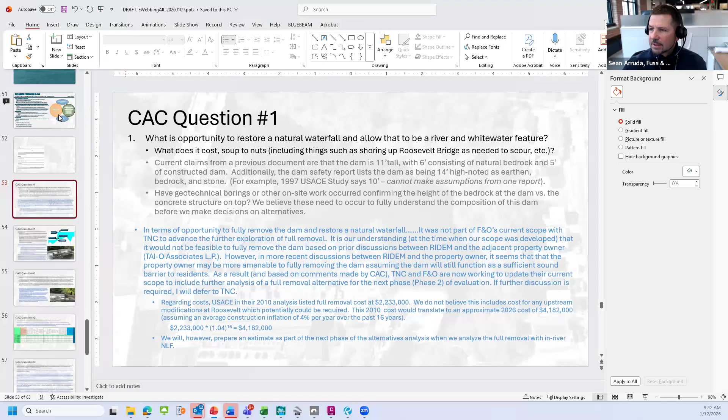And what I'm gonna do, if you guys don't mind, I'm just gonna share my screen super fast. So what you can kind of see is I'll take, for instance, this next steps of our analysis.

So within this, we've updated this now. So again, all of this is going to be called phase one alternatives assessment. Phase two, we're going to get spot elevations within the raceway channel. We're going to get river bottom elevations, which we're going to call ledge elevations, on the downstream side of the dam as part of phase two. That way we can get a better understanding, kind of like what Stefanie was saying earlier, of what the actual ledge elevations are. Obviously we know it's going to vary, but we're going to better capture that as part of phase two.

We are going to run a full removal alternative under this as part of the phase two assessment, so that then we can compare what we've done today to this full phase removal, and I can kind of show you that.

Unfortunately, with the first phase that we did, this is the results of an in-river survey that we obtained, from Roosevelt Street. It includes bathymetry, the spot elevations. I know it's a little tougher to see, maybe if I select on one they'll pop out a bit.

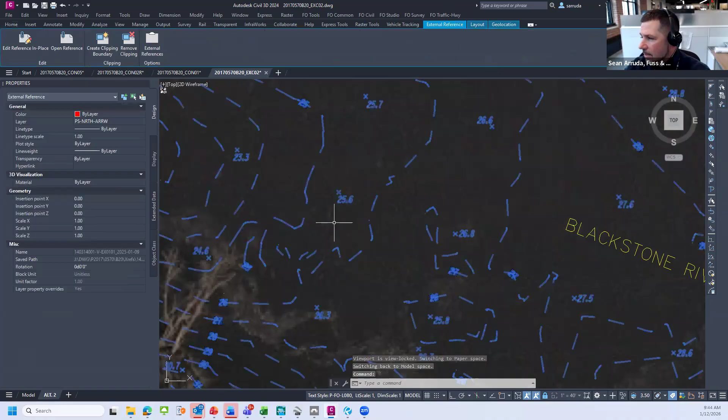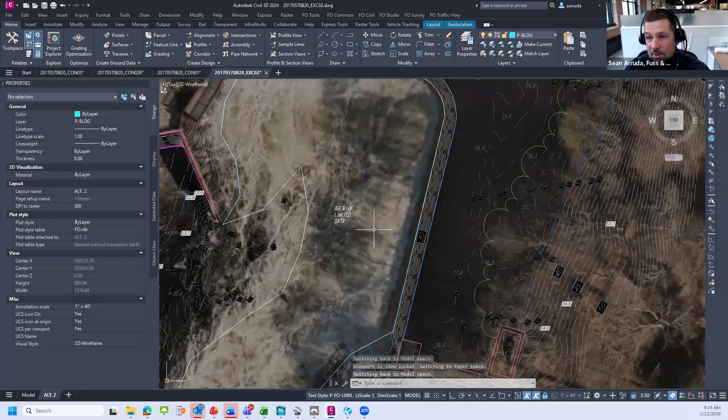At the time the survey was done, we have channel bottom elevations on the upstream side of the dam, going down to elevation 25.1, and we know the spillway crest is about 34. We didn't have any data downstream of the dam itself, because at the time of the survey it was unsafe for the surveyor to get in there due to the turbulent flow. So that's the piece of information we're looking to get and update our survey with, so we can better understand the ledge elevations that exist out there.

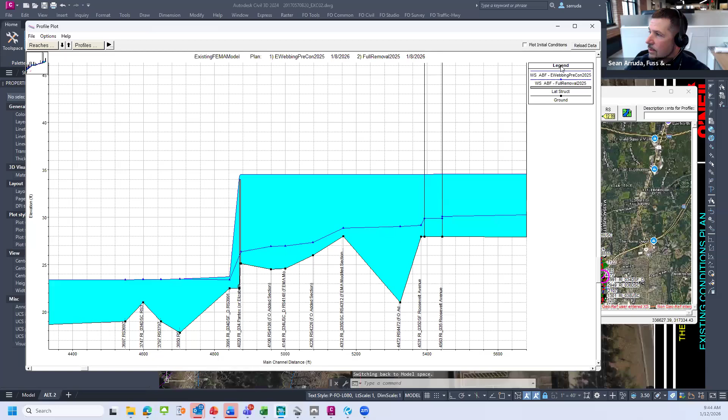This took a minute to do, and this is just a rough HEC-RAS model. The profiles I've included are ABF, aquatic base flow conditions, kind of what you typically see out here in September and August. So this is current conditions with the dam in place. The elevation's about 34.52. Again, this is not a detailed analysis.

I simply came in and took the dam completely out of there, and now you can see what that does to the water surface profile. Clearly there's going to be a drop, we all know that. But that's what we're looking to further develop from now, getting information on the downstream side of the dam itself.

So does that make sense in terms of how we're going to now incorporate this full dam removal?

I think maybe the non-technical among us, I certainly have a lot of questions about how this works, understanding how many weirs you'd need and whether the rock ramp would work or not, but maybe that's a future conversation.

Yeah, so clearly what's going to happen is we have to take the dam out. I'll give you an example. Let's use this profile, I'm going to use the 95% exceedance. I'll show the ABF, and this is what we look at.

Once we actually update the existing conditions model, and then take the dam out of there, that's going to reflect existing ledge. Things are going to pop out like, hey, what's a problem? Looking at this, I know it's maybe tough to put in perspective, but this is the dam, and this structure right here is Roosevelt Street. Clearly you can see there's a big, I don't know if it's a scour hole or whatever, there's a depression in the channel bottom here.

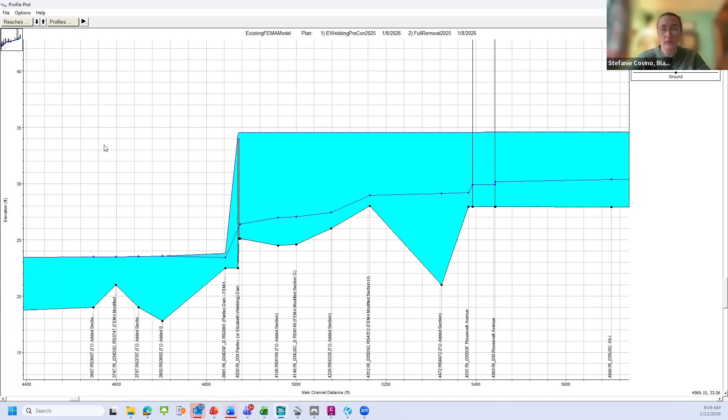Would the dam removal enhance this whole project to funders? It seems like they want to fund dam removal, so having one in the series of four, would that be an asset to finding funds?

I John, go ahead. Yeah, I was going to say, Jason, go ahead. Yeah, I'll give that a shot.

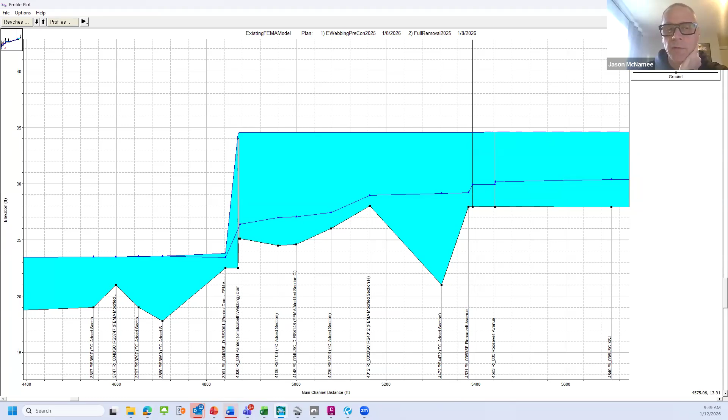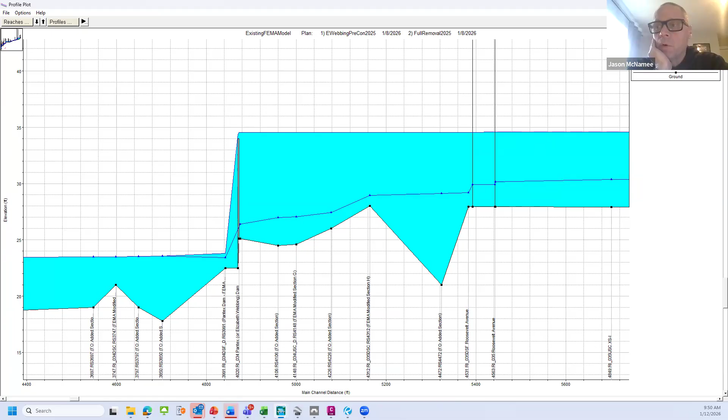I didn't mention this when I introduced myself, but I do have to jump in a couple of minutes. But Stefanie, to your point, the answer is yes, by way of NOAA. I think that scores a lot of points. If we're going after NOAA funding, it depends on the funding source, but generally speaking, NOAA likes dam removals. That's what they're generally after, and it scores you points in their applications. At least it used to.

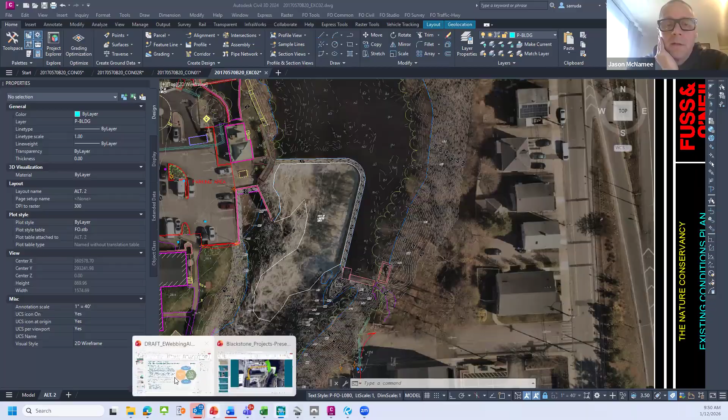That being said, this will tie into the other things I wanted to say. I really appreciate this extra work. I think this is of interest, and I think we were inclined to just look at it and say it's going to be super challenging to do a full removal, so let's not think about it. But in further discussion, seeing the questions from the CAC, it's clear that we need to understand this option better.

So I'm really enthusiastic about this extra work, trying to determine - we have a lot of conjecture about the bedrock. Maybe it's more than conjecture, but we think we know where it is, but now we'll know for sure, and then we'll better understand that as an option.

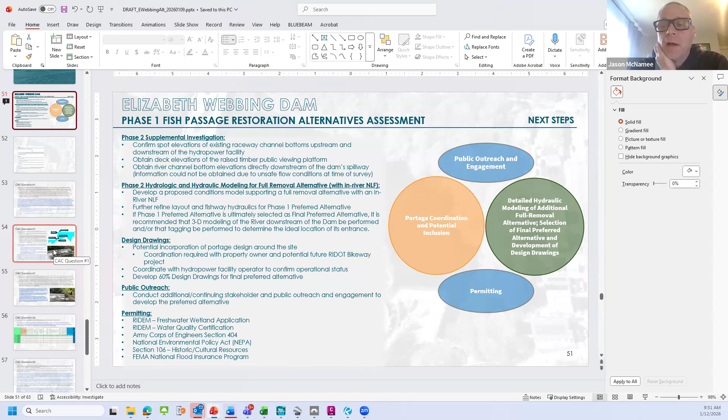I can tell you, all other things notwithstanding, in speaking with Phil Edwards from DEM's Division of Fish and Wildlife, run of river is always what we want - that's our optimal. But I just want folks to temper their expectations. We've got road infrastructure, all the stuff Sean just talked about, and even within DEM, wetlands permitting - if we start putting a bunch of structures in the water, that changes the parameters of our interaction with them. There's a lot of things we need to think through, but we will think through them.

I think that this is really a positive development in the work here at Elizabeth Webbing. So hopefully I answered John's question and prattled on a bit myself, but hopefully that helped.

Thanks, Jason. Bruce - so I guess the overall question for me is, as we're looking at all of these things, and you've already done some preliminary work, what are we looking at for timelines so we can actually look at it and know how we're proceeding? Because it seems like, from Jason's conversation, it's a lengthy process, but there could be an estimate of time spent on looking at that, and I'm curious what that is. And then the other part is, based on either of the fish ladders you're talking about, whether it's the side slotted or the natural one, what's the maintenance cost?

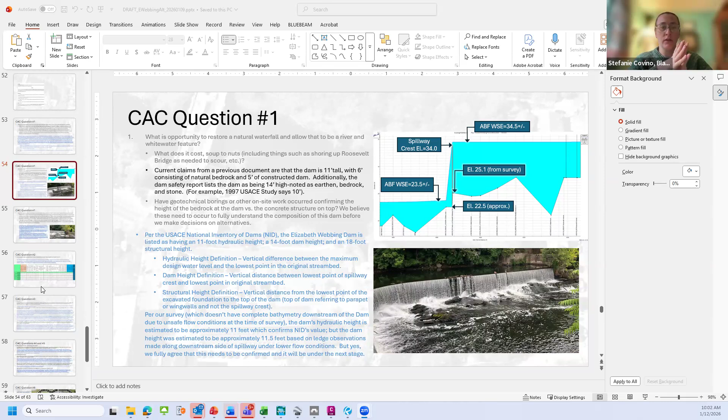I know we're jumping around a bit, and we have the full list of questions, but I wonder if it makes sense with the time we have left to summarize those into a few pieces. One was about considerations of full dam removal, and we've talked about that quite a bit. There are other elements, such as what Bruce mentioned around maintenance, and also long-term costs versus short-term costs, especially around that maintenance. Maybe it makes sense to talk more about the matrix of alternatives, explaining the velocities — that's less of a question and more of a 'can you help us understand this.' Then there were a couple questions around climate change considerations.

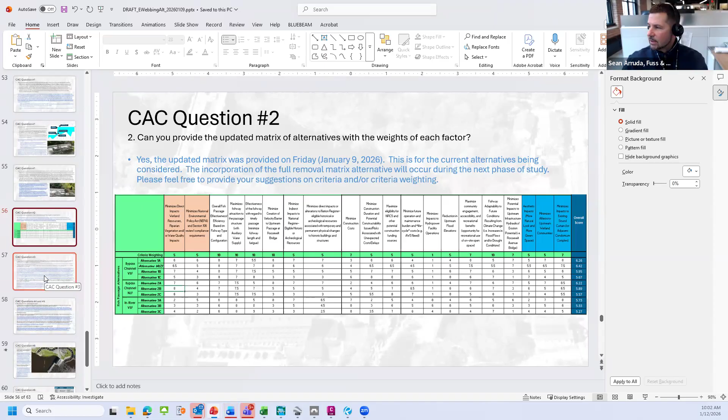So what I did is I tried to write down — you can still see on my screen here — I tried to put down your questions and put some responses in preparation for this meeting. I think the matrix is going to take a little bit, so maybe we can look at the velocities a little bit, that goes into question three, for instance.

I think your first question was about recreational paddling upstream. We heard that at the last meeting, and that was already removed from the matrix. So we're not making any sort of decision on that. It's not really a factor in our criteria for upstream paddling.

What we're looking at, when we talk about velocities - bottom line is this is the standard. We follow standard criteria, U.S. Fish and Wildlife, NOAA. We've been designing fishways this way since the Lower Shannock Falls dam removal back in the 2008-2010 timeframe, and we use U.S. Fish and Wildlife NOAA guidelines to design these sort of fishways.

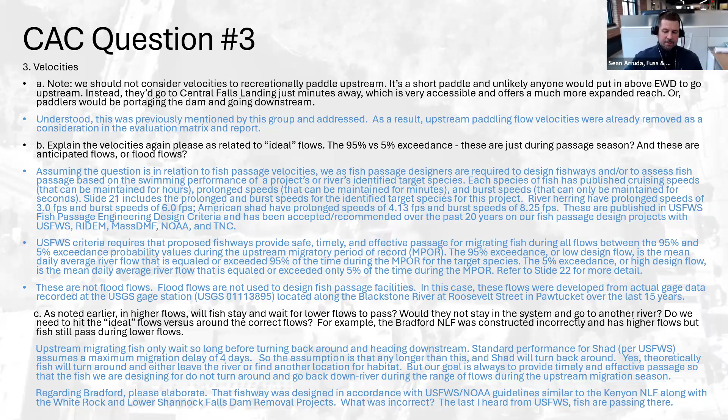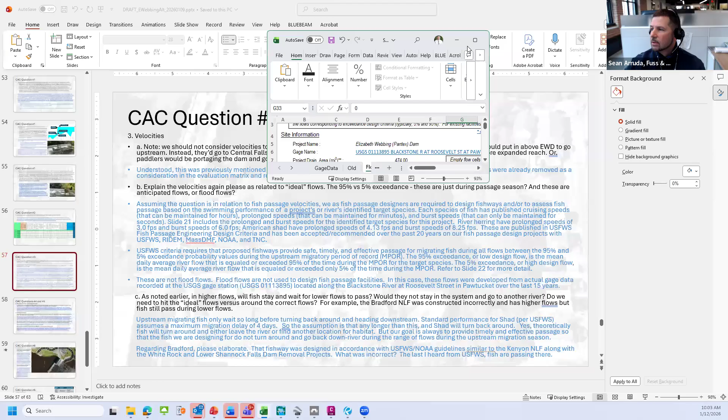So what they typically require is looking at what they call 95%, 50%, and then 5% exceedance flows. Those are specific to the upstream migration season. Maybe this helps, maybe it makes it confusing, but I'll give you an example.

This is our Excel data spreadsheet on how those flows are developed. We come in here, go to the gauge data tab - we download the USGS gauge station data from Roosevelt Street, all of their daily data, over the last 15 years.

The reason we don't pull older data than that is because we're trying to recognize that the climate is changing - flows are a little bit different now than they were back in 1960, 70. So we look at the last 15 years of data downloaded from the gauge station.

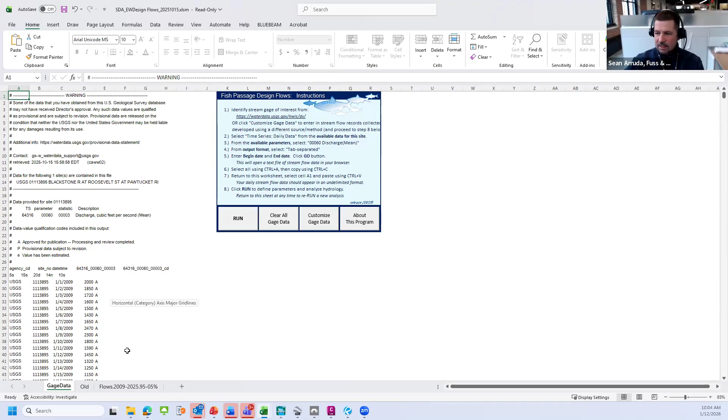This spreadsheet format was from U.S. Fish and Wildlife. The gauge data we got was from January 1st, 2009 through October 14th of 2025. We also specify the upstream passage season - based on the target species here, we're looking at April 1st to June 30th.

That takes all the daily data we've downloaded, specific to the fish passage season, and it spits out the 5%, 50%, and 95% exceedance flows. The lower flows that occurred during the upstream migration season are the 95% exceedance, and the higher flows are the 5% exceedance - that's the Q5, which is about 2,594 CFS.

During the upstream migration season, based on the last 15 years of data, this is about the highest flows you're going to see. So that's what we use as an upper limit for designing fish passage, assessing velocities, flow depths, etc.

Then we look at the 95% exceedance - that's 274 CFS going through the river at this location. That's what we make sure we can get adequate flow depths and velocities during the lower flows, so we know we're achieving the depths required for the fish species, as well as the flow velocities, for that range of flows during the upstream migration season.

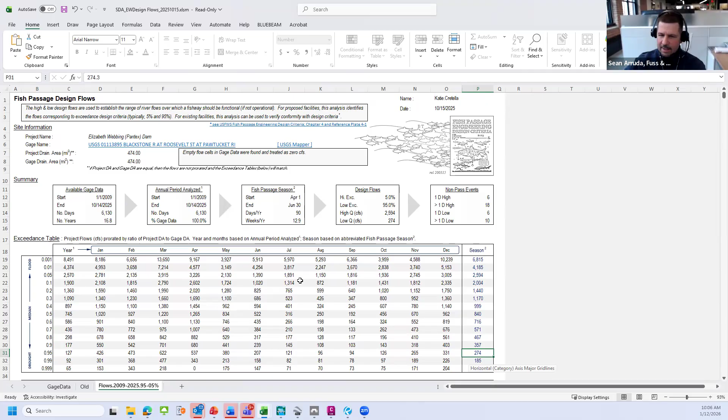We clearly look at the 50% too, but bottom line, that's what the 95 and 5% exceedance flows are and what they're used for. This is again standard criteria when designing fishways. Does that at least kind of make sense? Did I do justice in describing that?

I think so, I think I got some good notes down, but I'll ask others if you have questions.

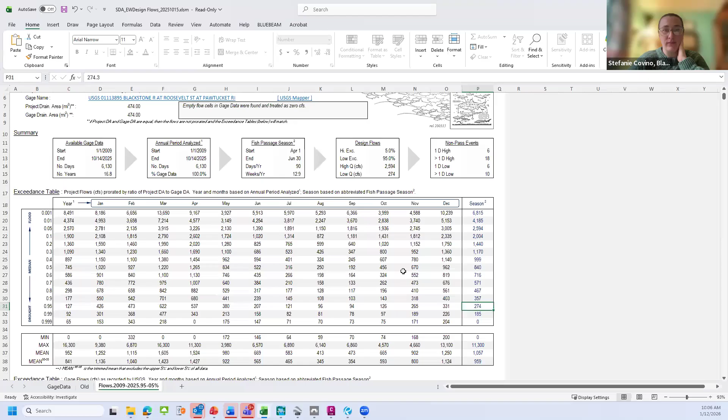Part of the other thing this does, that's just specific to the upstream migration season - we can also pull from this data, for instance, overall, forgetting just the period between April 1st and June 30th, based on that daily data we can pull out drought flows as well.

That was one of the questions - that's how we relate it to resilience, we'll say. We know, for instance, that 99.9% of the flows that occurred from 2009 to current day - only 0.1% of those flows were less than 65. So that's what we'd use as an extreme low flow condition.

That's part of the flows we've analyzed for our alternatives too, so we know we can get adequate flow depths in the fishways even during an extreme drought. Our target species aren't moving through the river during that period, but you may have resident species utilizing the river, so we're also meeting minimum depths needed for even this extreme drought condition.

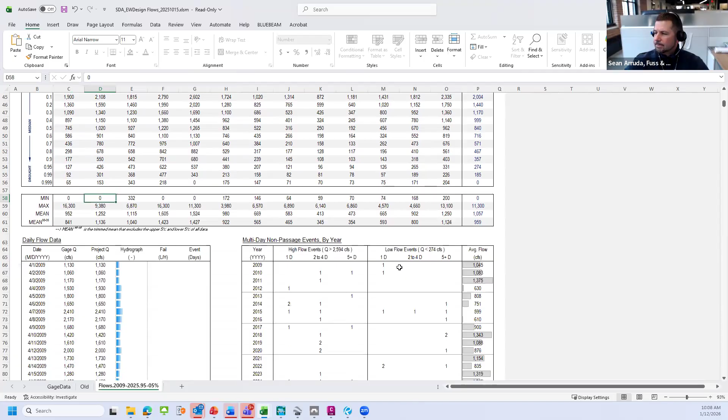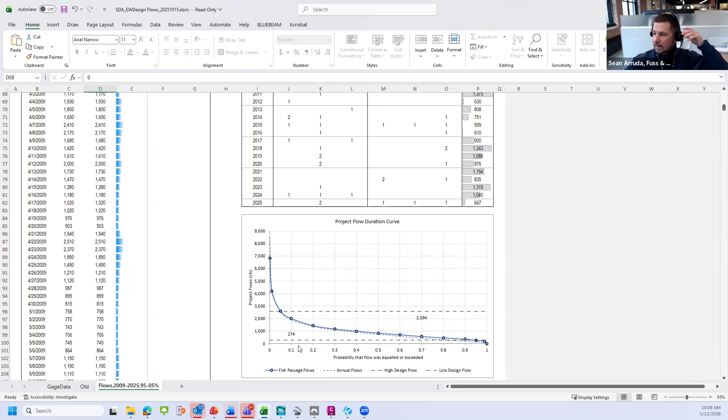So that's the other thing we can pull from this data. It gives a nice project flow curve - you can see 274 and 2594, your 95% exceedance and 5% exceedance flows. That's what we're essentially married to here. That's what we have to meet when we analyze upstream passage.

I don't think the question was saying you're choosing the wrong things, I think it was just hard to understand what it means. Understood, that's fine. For me, it's been doing this so long, I don't even think to explain it - it's just the way it is. But yeah, that's it there. Thanks, and we can share these out with everybody afterwards so they can read through as well.

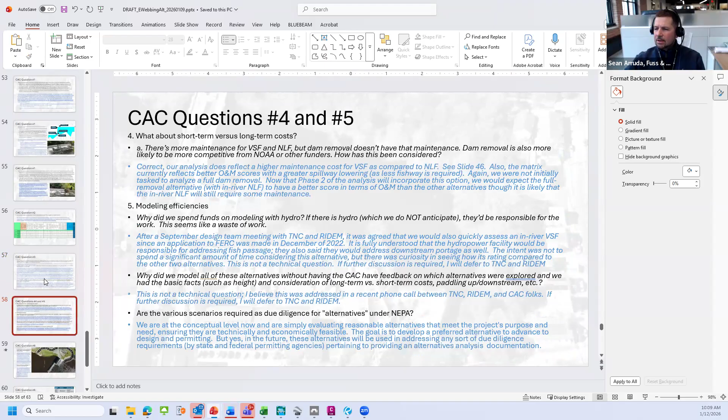So that was the question on velocities. I know there was a comment made and I wanted to understand it a bit. It said the Bradford Nature Like Fishway was constructed incorrectly and has higher flows, but fish still pass. Do we know what was incorrect about that? I'm just curious - it's not something I'm familiar with.

One of our other CAC members wasn't able to attend this morning, but my understanding is that the baffles were supposed to be on each side so the fish could jump from one to the other, but instead they were even, so the fish had this really high flow in the middle, but they were still able to get through.

That's helpful to know, because we certainly designed that years ago. I know US Fish and Wildlife did tagging and performance efficiency studies there in 2018 and 2019. In 2018 at Bradford, at least 67% of the alewife got through there. In 2019 it went up to 100%. So I think that was her point - even though it had higher flows than anticipated because of how it was initially constructed, fish were still able to get through.

So they would wait during those higher flows at the bottom pool, and when the flow is adequate they could still get up. The question was, if that's the case, particularly with dam removal in mind - if we're looking at full dam removal and we see high flows, is it automatically 'nope, we can't do this'? Or is it that there are high flows at certain times but the fish will wait and get up during other flow scenarios? I honestly don't understand how the rock ramp and weirs work, but if they could get through the weirs, would that solve it too?

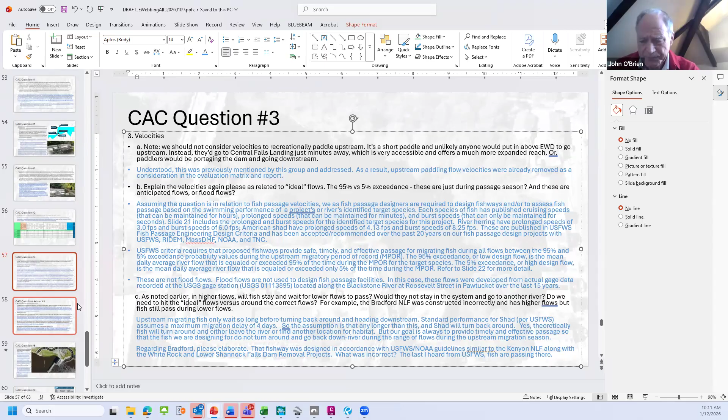I'll tell you this because the first nature like we did was at Kenyon, which is kind of a smaller version of Bradford. During that we had staggered low flow notches. At Kenyon the low flow notches, because there was less flow, were about 6 feet wide. At Bradford they're 10 feet wide. NOAA, who was part of the project team that reviews our designs, actually recommended having them in line as opposed to staggered. I think the reason is it creates a more consistent flow jet through the pools. I can't say whether they work better biologically since I don't have that background, but NOAA reviewed the Bradford design too, and their preference is to go straight instead of staggered.

We just did one up in Marshfield, Mass, a smaller version of a nature like, and we did do the staggered notches there. That was under Mass DMF review. So I'm not fully sure which one is better or not. I don't know if one potentially holds a little bit more sediment than another.

I don't know, Greg Allen, you're on the line. Do you have any experience with having those low flow notches in line or staggered? What's your experience on that?

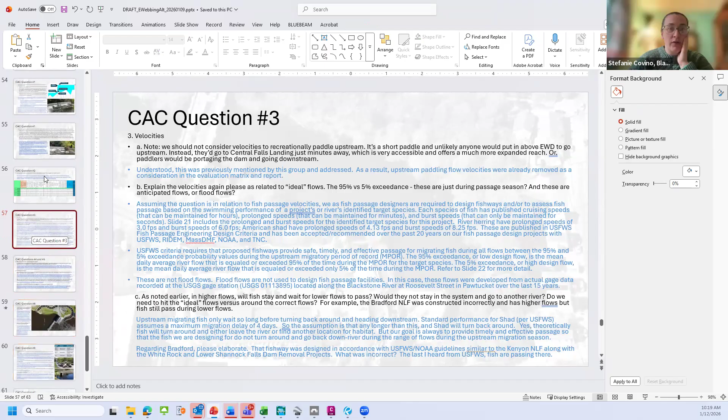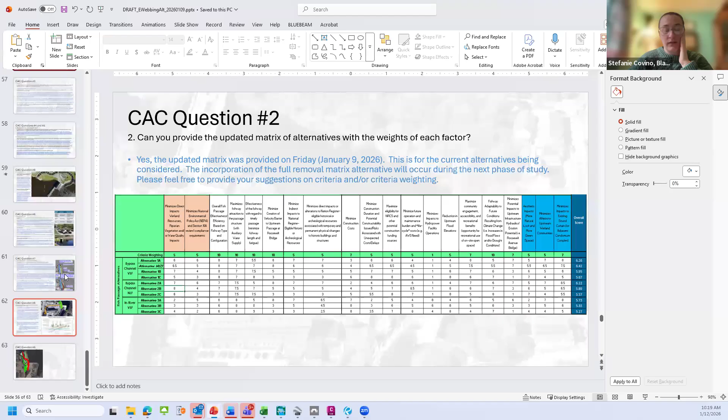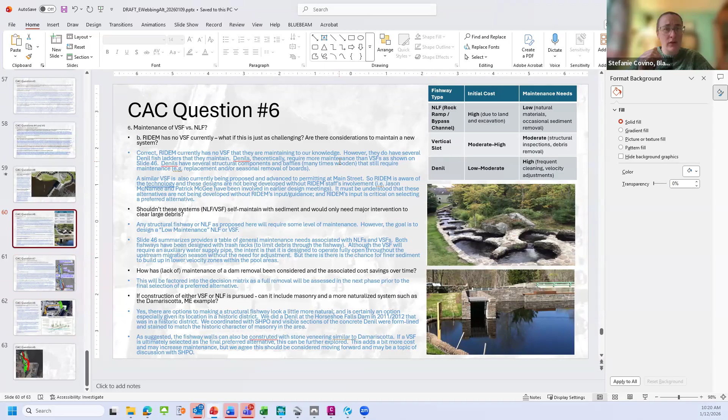I did want to highlight one thing quickly on the alternatives and discussion of maintenance, because we'd said previously maintenance is of course a concern, and if we can't maintain it, we don't really want to build it. There's a consideration of how much maintenance is included. I think maybe there was some confusion before that a Nature Like Fishway had higher maintenance or concerns about maintenance. But actually, in our last conversation, Nature Like Fishways are the least maintenance and they naturally sort of clean themselves with higher flows. That's a big differentiation I wanted to highlight.

Right, and you can see that here in the table - that table's taken from our report too. We're showing Nature Like as having lower maintenance needs than the vertical slot. I think the thing that's important to understand here - and I don't need to show the whole thing, but it's really important - I would say that this is true, we just have to realize that what we're putting in here is also a little bit of a hybrid nature like fishway.

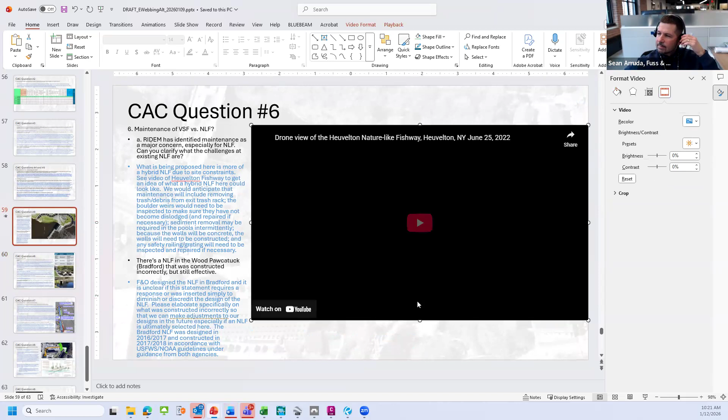Sorry, hold on. Can you guys hear anything? Okay. Give me one second here.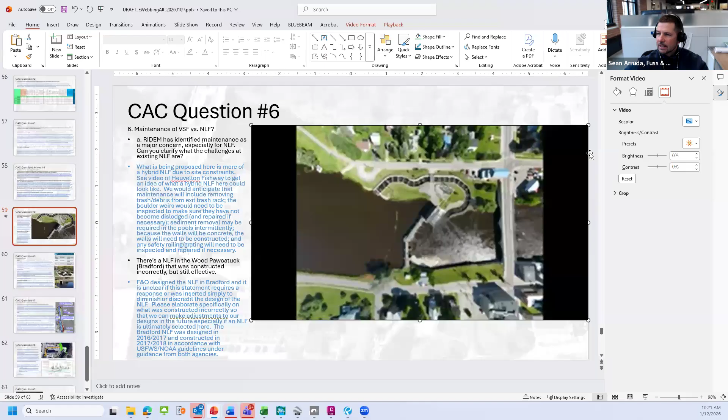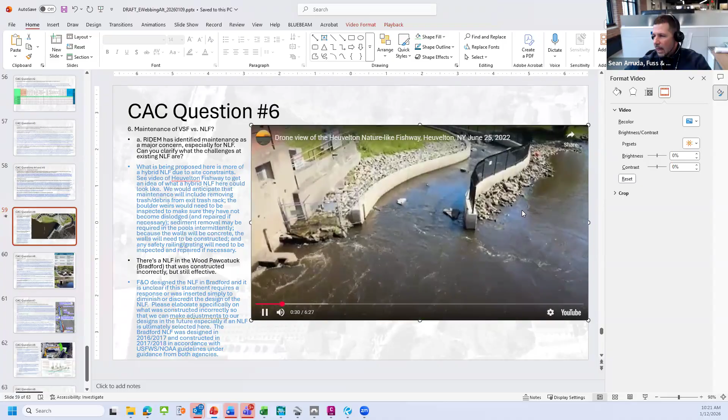So this is a nature like fishway in New York that currently exists, and it's kind of what I would envision here a little bit. It's somewhat of a hybrid nature like fishway, meaning there are some harder components to it - like the concrete walls on the sides are going to be vertical. There's not enough room on our site to actually slope up at, for instance, 2 to 1 - it's not going to happen.

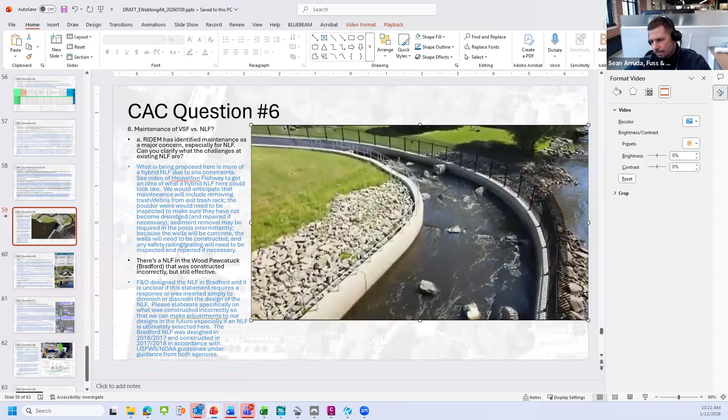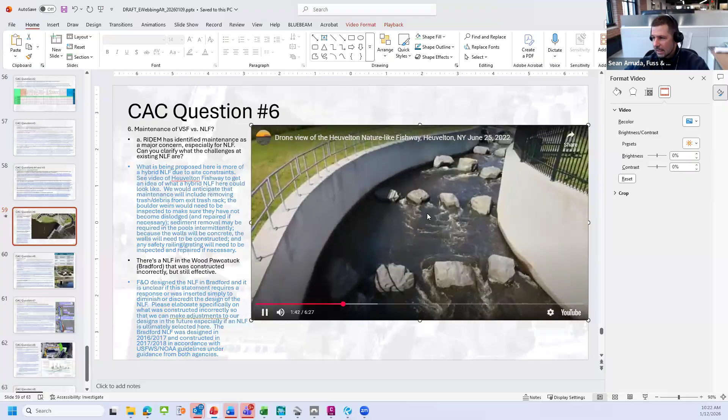So this is why in our case, our nature like is a little bit of a hybrid. I do think there's going to be a little bit more maintenance needs for this hybrid nature like than a typical nature like. So I wanted to highlight that - I think it's important. We don't have to watch this whole video, but just to give you an idea, here you can see the boulder weirs, so it's natural in that regard, but the sides are probably going to be harder concrete. So there's a chance you might need to fix the walls if there's some spalling that occurs. Sure, maybe - debris is always an issue no matter what type of fishway, getting through there. But we do have trash racks on the upstream end to hopefully limit larger debris from getting in and causing big disruption. This is kind of what I envision for this site, and nature like would be roughly similar to this.

All right, I'm gonna stop it there. But yeah, I thought that might help a little bit to visualize it for you guys too. Yeah, that's very helpful. I think pictures are definitely helpful. Thanks.

You're absolutely right. Normally we'd anticipate that nature would be a little bit lower in terms of maintenance needs, but here there's going to be some upkeep. That was one of your questions. You can see some of the photos in there while we're talking about it, about the potential to instead of having just a solid concrete look here, for either alternative, like that.

For instance, the photo on the bottom right, that was actually from Horseshoe Falls Dam, and I'll zoom into it here. SHPO was involved there. This was a historic register area, so any concrete walls that we proposed that were visible, we had to actually form line them. So they're concrete, just form lined, and then stained to match the historic color of the masonry in that area. That's certainly an option in this case, especially knowing that we're within a national register historic district here.

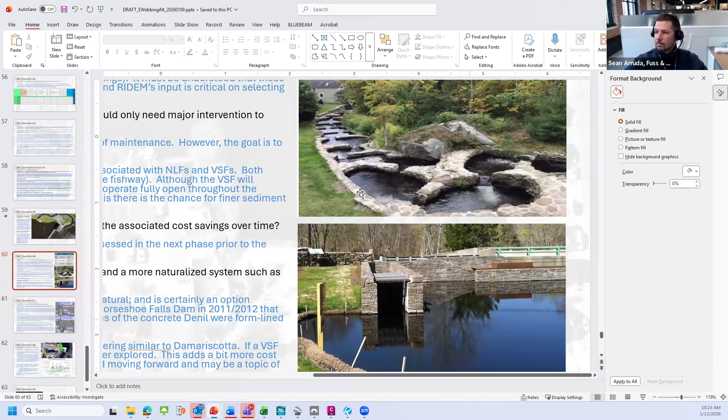Bruce: So the photo you showed, with the boulders in the middle, that's not really a weir. Those are just sort of like barriers. Well, we call them boulder weirs. Yeah, okay.

Because I'm thinking about it, since I've looked at a lot of historical weirs that we've found in different parts of Massachusetts, and the weir is really about creating the pools to keep fish within. Those are just more of a barrier to control the flow. So yes, the boulder weir configuration there, that's not what we're proposing.

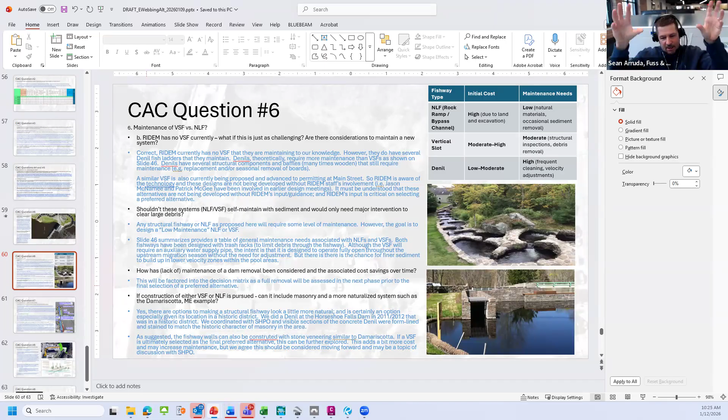What we're actually proposing is more of a solid weir with a 5 foot wide notch, probably 30 to 33 inches deep, we'll say, so a little bit more than 2.5 feet. I agree that's not fully what we'd propose here for weirs, but essentially they're doing the same thing, in the sense that instead of having one notch opening, the one we're looking at had multiple, with 18-inch openings between multiple boulders. So they're still kind of holding back flow a little bit to help create the pools because there are hydraulic drops across each one of them. But our boulder weirs that we'd envision here would not be exactly like those.

Yeah, I always think about that because in language, we built weirs very specifically to pool the fish in for easy fishing. That's really what that's about. And then when we wanted the water level to drop after we took what we took, we let them go through that. So it was just the opposite. The concept of calling it a weir, I'm a language guy, so when I start to think about that, it kind of goes opposite of what the thought of a weir is. Understood, understood. That's the only reason I was asking about it.

Yeah, I appreciate that. That's one of my downfalls is I grew up with my grandparents who didn't speak very good English, so I was taught to understand the intent of what they're saying, not focus on the actual words. But I get it, that's not very good when you're trying to explain things. So yeah, I appreciate it.

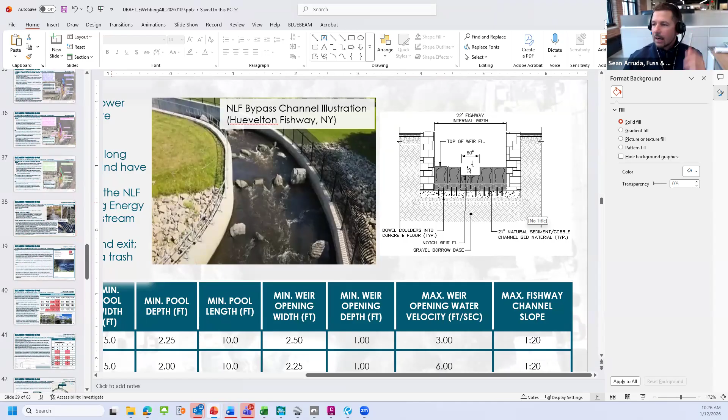Stephanie, do you want to go back on the alternatives matrix? Yeah, I'm going to pull this up in Excel instead. It's pretty much the same matrix, but looking specifically at your question, it was in relation to the criteria weighting. This was kind of our first cut at figuring out what is most important to the project.

What you can see is we gave a weighting of 10 to anything related to fish passage — that was very important to us. We gave a 7 rating to minimizing construction costs, so cost was another factor we weighted a little higher. We didn't put much focus on hydropower facility operations, giving that a 0, which is pretty minimal.

We also gave a 7 to community engagement, accessibility, and recreational benefits — the opportunity to use this site more for on-site open space. One thing we came across reviewing the preservation plan for that river corridor, which is a national historic register area, was enhancing views to the river and creating more recreational space, similar to that overlook park upstream of Roosevelt Ave. So we gave that aspect a 7.

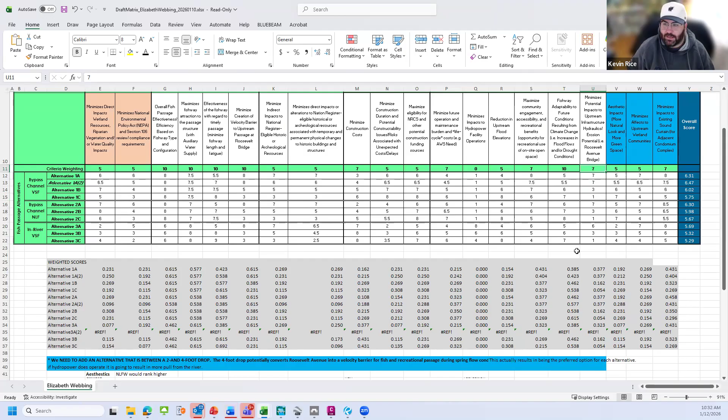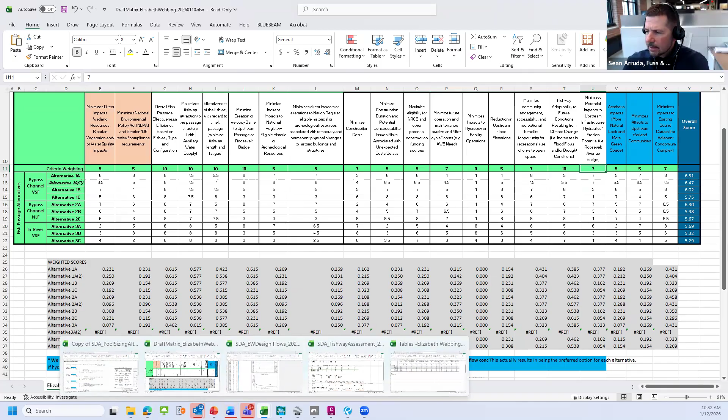The scouring score and impact on upstream infrastructure—was that prior to knowing how bad that scour pool is, the one shown in your model, that really large dip that already exists just downstream from where you are? No, I mean, clearly that's factored into the model, that hole that exists. But let me see if I can show you.

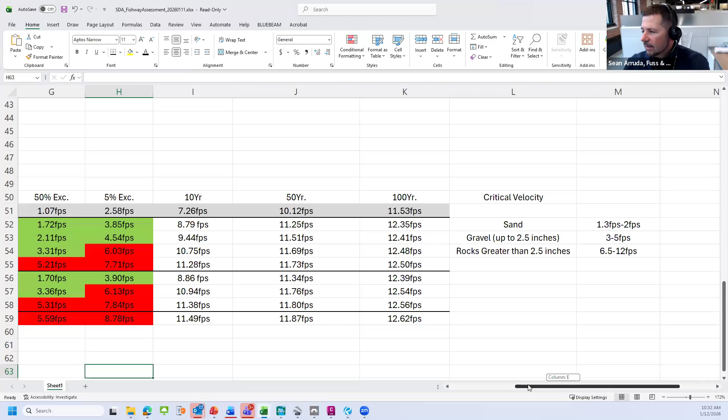I'll give you an example. Let me hold on. I can probably zoom in, and we don't have to get lost in the numbers, but this helps illustrate some of what we're seeing. So under existing conditions right now...

I'll use the flood flows. The 10-year velocity going through there, the maximum through Roosevelt, is about 7.26. The 50-year was 10.12, and the 100-year 11.53. So you can see that with a 10-year of 7.26, as we start to lower the dam, the velocities are going to start to go up. So even with a 2-foot removal, velocity increases from 7.26 to 8.79.

You go to a 4-foot removal, it goes up to 10.75. A 5-foot removal, 11.28. And again, just quickly taking the dam out—not saying this is a fully vetted full removal—it goes up to 11 and a half. So you have an increase of about 4 feet per second going through there for a 10-year event.

For the 50-year, it's going up from 10.1 to about 11.87—not that significant, in my opinion, of an increase. The 100-year going from 11 and a half to 12.6.

It's just a matter of, for instance, the existing 100-year—now if you do a full removal, that's going to relate to a frequency of about a 10-year storm if we fully take the dam out. So you're going to see those flows going through there more frequently than before. That's where we'll have to go in and look at the scour potential. It's more about the potential for scour. That's kind of how we looked at it at this concept stage, the 30% stage—what's the potential that scour could be an issue.

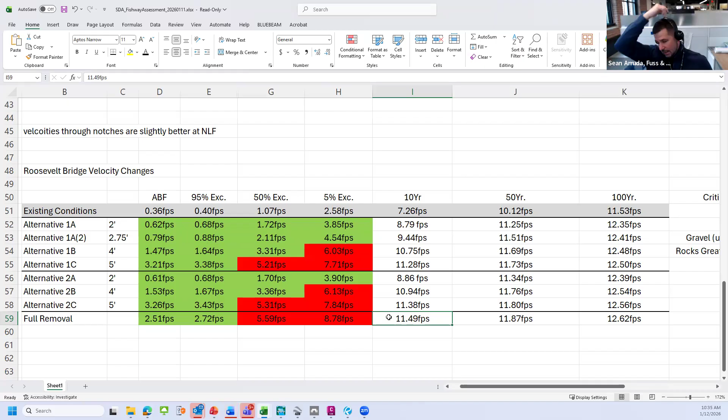DOT has installed scour countermeasures—they call it Class C riprap, a really old classification term, which I think is probably about R5 riprap now. So they've had some scour concerns on one of the abutments, I forget which one exactly. There's some potential that we do need to look at scour under the Roosevelt Bridge, but this gives you a rough idea. The other thing, which Stephanie touched on a bit, is what we're talking about with velocity barriers for fish.

What you can kind of see is that right now for the fish passage flows, the flows vary from 0.4 feet per second to 2.58 feet per second. Fish can get through there, not a problem. For instance, the alewife handles 6 feet per second.

So you can kind of see what I highlighted in red, where we start to see that spillway lowering increases the potential that the bridge would become a velocity barrier for fish moving upstream. I know we're not supposed to be talking about that now, but that's kind of what we're looking at a little bit when we say scour potential under Roosevelt Ave.

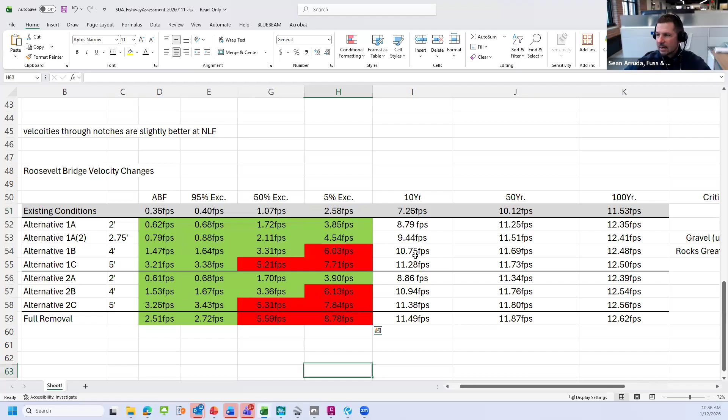So it's a balance of including, yes, it might affect the bridge, and maybe there's something we can do to protect the bridge, and that's not necessarily the problem. But if the velocity is too high for fish to be able to pass, we're shooting ourselves in the foot.

It just means that now we're going to have to invest some money to make passage under Roosevelt Ave conducive. So it may be a little bit more than just, hey, we're gonna throw in some scour countermeasures.

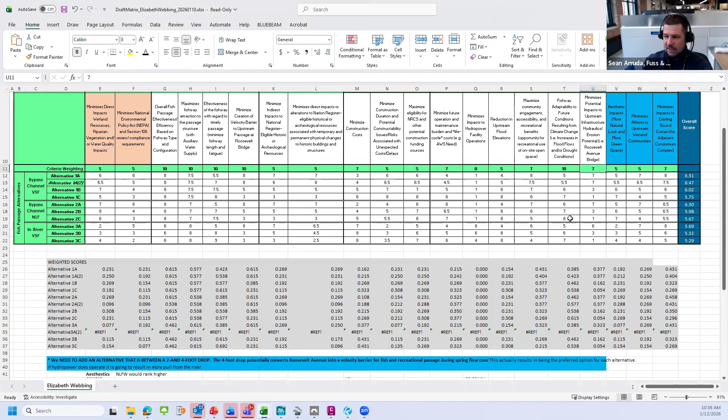We may actually have to shape out a little bit of a channel there and make sure it stays there, so that increases the cross-sectional area of flow so that the velocities are conducive to passage for the fish passage flows. Yeah, so that's kind of what we're seeing.

Any drop in the spillway likely of more than 2.75 feet - I think that potential exists that we may need to look at doing something under the bridge. Which seems like a lot to include in one number there. Yeah, yeah, it does.

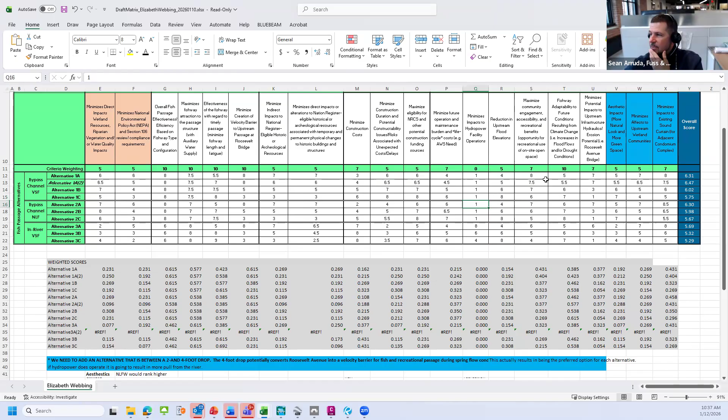So we're going to zero out the impacts to the hydropower. I'm going to bump up the criteria weighting for O&M to 7. And yeah, okay, so that's where we kind of stand at this point. Are there other thoughts from folks?

The only other thing that I thought of, which is probably my naivety, but I know things are a little bit different between Massachusetts and Rhode Island. In Massachusetts it's still hard to permit restoration projects, but it's getting a little easier. I think in Rhode Island it's a bit tougher still, but I would hate for something to be chosen as the desired alternative, but because it's harder to permit, we don't want to do it.

I feel like we should just pick that battle and fight for something that's a good restoration project on the Blackstone, which is really well deserving and over deserving of fish passage and restoration. So I don't love the first one, of wetland resources, but again, I think it's a little bit of a balance.

I hope the regulatory climate changes so that this becomes easier and it doesn't have to just say we're going to kill the project because of it, but I know it is a consideration now. So I would maybe ask others what your thoughts are, not to put you on the spot, Darcy, or if anyone else wants to have thoughts on that.

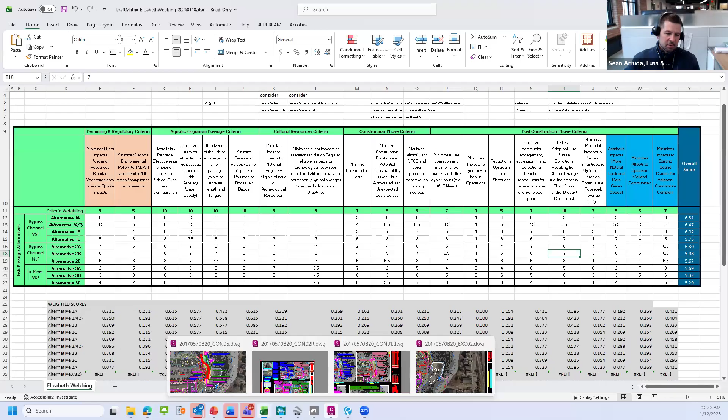We've got to make sure that wherever we're putting this entrance, that's the downstream entrance to the fishway—I can pull it up, just a graphic here, and I'll pick this one. This is the entrance, for instance, I'm talking about for a nature-like fishway here. We need to, because this is not on the immediate downstream side of the dam, make sure that the fish can actually find this.

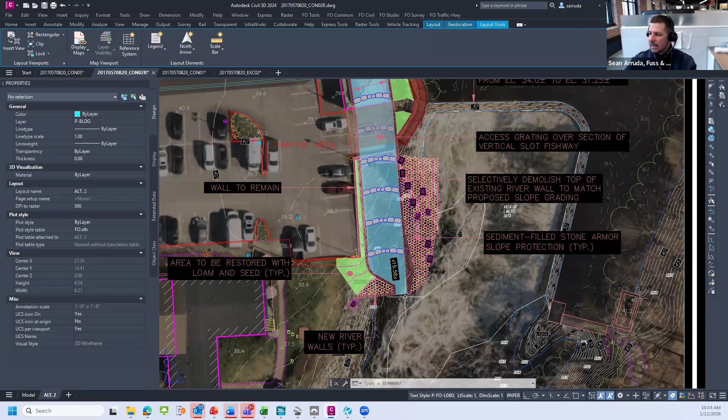I think that to me is probably the biggest thing we want to make sure we nail down. This location, I can tell you, was something we put together through discussions with U.S. Fish and Wildlife and Greg Allen, who's on the line as well. So this is an ideal location, but for instance, for Main Street, the location of that fishway was determined from actual telemetry tagging of the fish, so we knew kind of where they were hanging out downstream.

Moving forward, that would kind of be nice to be able to do some form of 3D modeling of how—because it's interesting right now—the flows come over this dam. This is not a dam that just spans directly across the river. You have flow coming over this way, you have flow coming over from this side as well, so there's a lot of turbulent zones being created right now.

So I think that's the biggest thing to this. But I guess, short answer is, I think we're so close with the ratings between vertical slot or nature-like, honestly I'm not sure there's one over the other. Greg, can you quickly either agree or give us your thoughts on that?

Sure. Yeah, vertical slot fishways, they're kind of preferred for shad and herring. They provide greater capacity and a good water depth for shad. Shad don't do well with pool and weir type fishways. The nature-like fishway here, I would say they're comparable, but it really comes down to how it's designed.

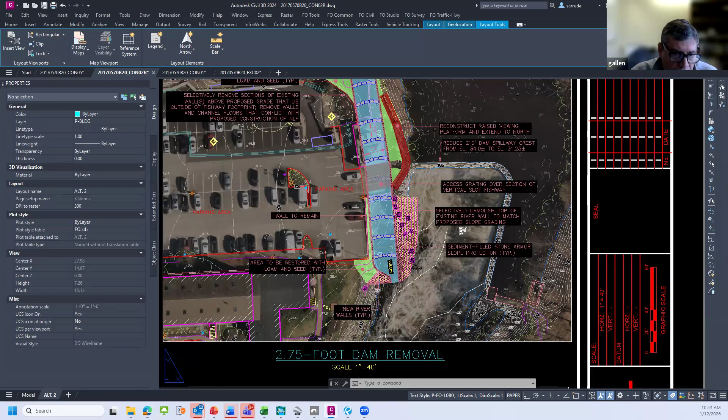As Sean mentioned before, this is more of a hybrid technical fishway design. It has vertical walls, so how you create those pools within that fishway is very important. But in terms of performance, one over the other, I think they're comparable—that's my opinion in terms of shad and herring passage.

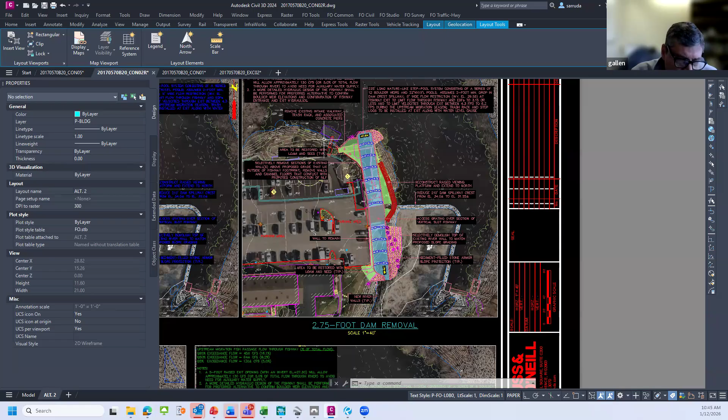And like you said, Sean, what's really important about this site, where it's a congested and narrow part of the river, the dam, is getting that entrance location right. I think we're probably close to where you're showing it now on the screen, but whether it's a nature-like fishway or vertical slot fishway, the entrance and configuration is pretty important. That's our best professional judgment just looking at aerials, but modeling would certainly benefit the design there and where and how that should be configured.

Thanks, Greg. Darcy, that's a little bit more than you asked, but your point of looking at the criteria weighting with and without the permitting - I don't think it's going to really change the overall conclusion. They're all going to be pretty close right now. We're seeing the vertical slot kind of edging out the nature-like option just by a hair.

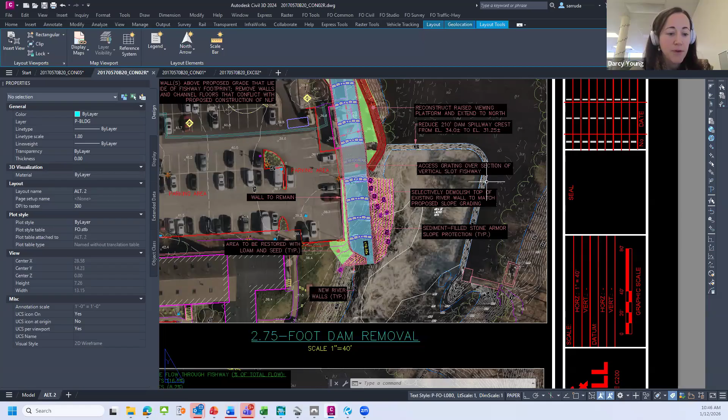Thanks, that's definitely helpful. And I think a lot of these thoughts are also, okay, if we're adding in this other alternative of full removal, how is that going to rank in comparison to all of these others?

Correct. And like I said, as part of this second phase, that's what we're going to take the same table and update it with the full dam removal option, with likely an in-river nature-like option, because that's pretty much what I anticipate we're going to need here.

So the last thing I'll mention is actually two things. One is in cultural resources - I know you talk about archaeological resources, but not necessarily these cultural co-benefits. I would look to Bruce's comments earlier, or if he has anything else to add, about preferences of tribes and the opportunity of incorporating more culturally appropriate ways to pass fish, sort of restoring that natural fish passage versus constructing something. I don't know if that's a consideration.

And then the last thing was in the last part of the blue - I know you have aesthetics, upstream communities, and sound curtain. I know that the sound curtain is really important. Last time we had a conversation with Jason, he mentioned when he talked to the owner, Lewis - he said sound is important, but it really is more of the whole picture of aesthetics, sound, recreation, sort of what are the benefits to that community. So I'm not sure if sound necessarily should be a higher ranking than the other aesthetic and recreational factors.

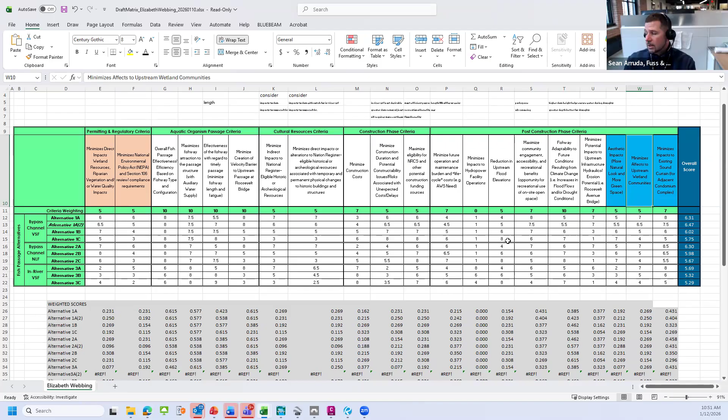Which we theoretically have, regardless, right? We're doing a partial removal. If anything, I probably would say 2 to 2.75 feet would be the minimum lowering. So right there is a partial removal. If the full removal works out being more advantageous, then I think that's only going to improve the funding.

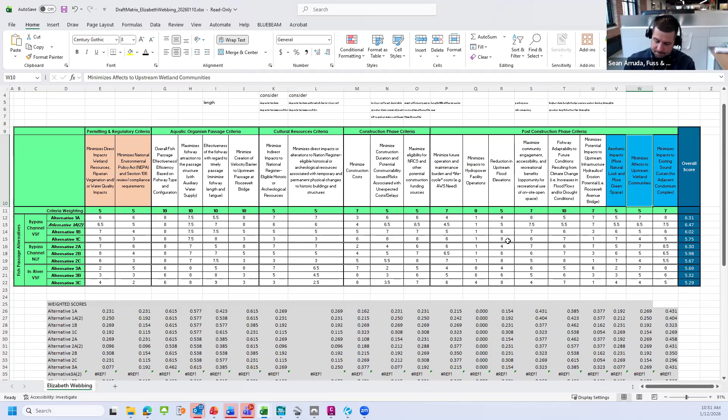So just to kind of finish that, knowing that we're going to either do partial or full, would you agree then that the full removal is going to have a higher score for funding than the partial? Absolutely. You're really potentially looking at restoring the main channel of the river.

And I think it was telling hearing from Phil the other day. Phil said from Fish and Wildlife's perspective, the first thing you always look at is, our preference would be full dam removal and fish getting through in the river channel. That's our number one. But maybe that's possible, maybe that's not. But I think we have to come at it with that mentality, that our reviewers for any of these projects will be thinking the same thing.

And so we have to show them whatever alternative we've come up with. We say, yes, we agree, we should look at that full channel restoration, but we couldn't do it because XYZ, or we could do partial because XYZ. So I think all of this is really helpful for us to have.

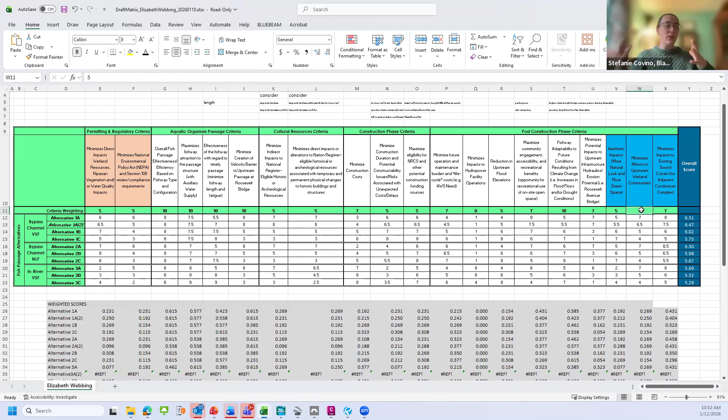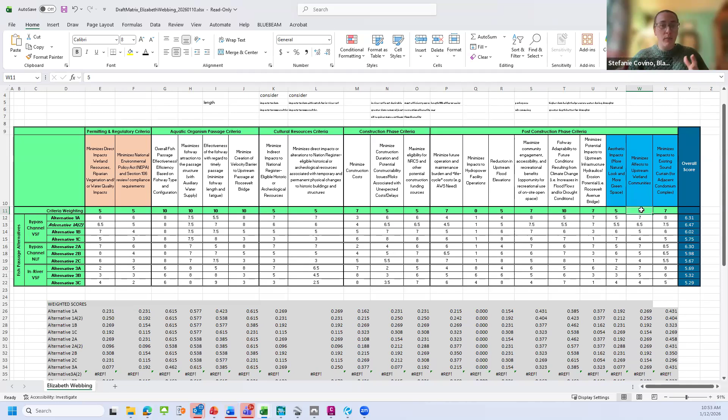I know it seems like we're kind of going backwards to go forwards, but whatever we come up with, I think we'll have a more solid product in the end because we'll be able to back up our claim of whatever our preferred alternative is. We really went through all the steps and we can prove to you that this is what's best, if that makes sense.

I would throw in also that we have a list of current alternatives, and we're going to add to that list with dam removal and the nature-like fish passage. And then we take a look at this algorithm, this spreadsheet, and we pick the preferred alternative - the one that we're going to have the consultant take to 60% design and permitting.

The issue with this, though, is that we really need to address the covenant in the deed and the ability to negotiate with Mr. Yip. And it may require, depending upon how much funding we have in the budget and what we're going to do...

...the development of a rendering of what a nature-like fishway will look like at this location, so he clearly understands by looking at a picture what the intent is. I think just a mere description and all of the engineering going along with schematics could be enhanced with the development of better visual aids, so that he sees that this is clearly an upgrade to this site completely. So I think that needs to be looked at in the future as far as the budget is concerned for this next phase two.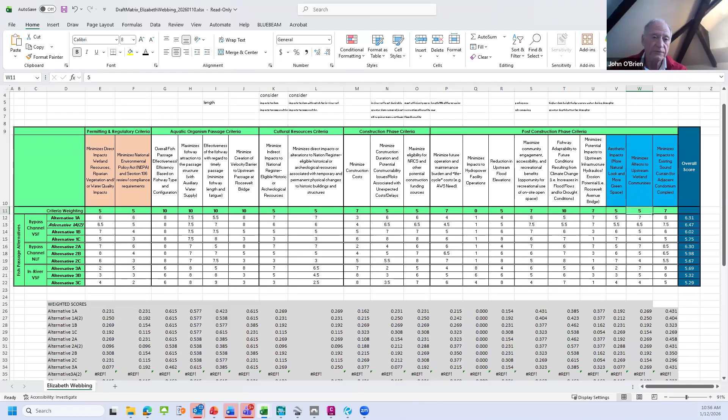Absolutely, I think right now the portal is Jason. He's established a relationship with him. I think this is something that goes through Jason to say, listen, can we enhance this portal? Can we enhance the negotiations and discussions with him by looking at our group endorsing this? But we really need to figure out the product itself first. I think we really need to see, is this feasible? What are the issues? What's going to happen? What's involved? Understanding that, then just a way to enhance this visually so that a meeting can be set up with him to come forward and say, listen, this is the direction we want to go in. We're going to need that before we take this to 60% design.

That's clearly on the list of the pathway forward for this.

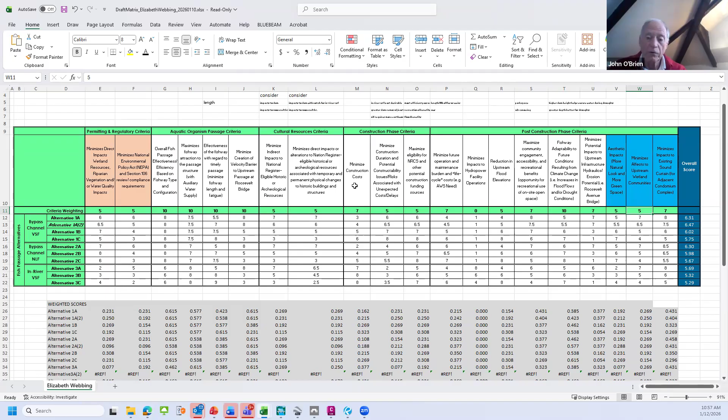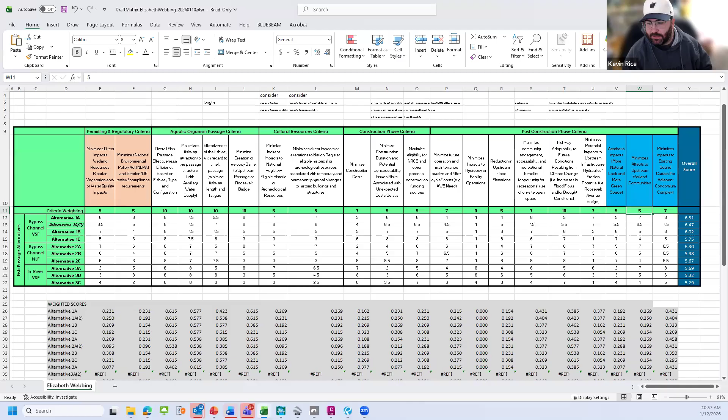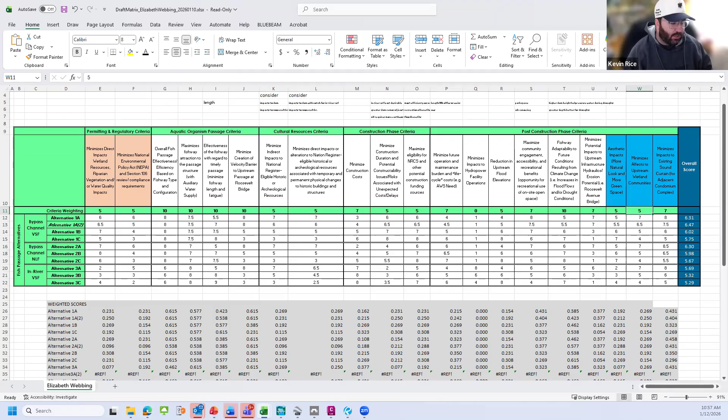Yeah, and I think the amount of work that organizations have already put in on parcels around there, like John with the Watershed Council with their Granite Park restoration efforts and things of that sort - there's a track record of people investing in this area, trying to bring it up to a more welcoming space instead of just slopes that go to the river full of trash. I'm not sure, like you're saying, I think the right way is through Jason, but it might be two separate conversations that do have a connecting link. While all the discussion about the dam goes on, I think also the discussions of how we can improve that site and the land around it could happen together.

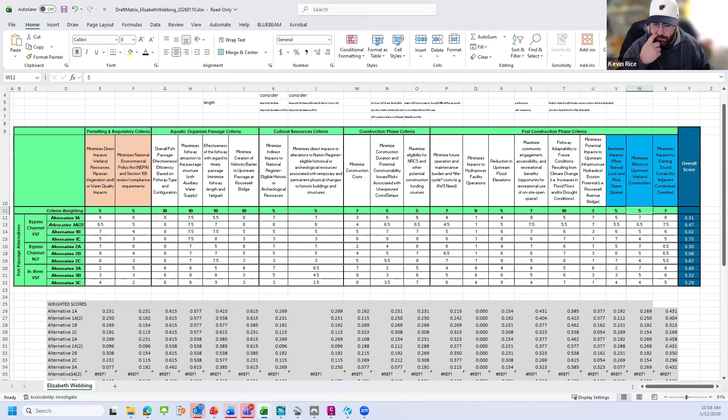Yeah, thank you so much. I think that's a good point. I've tried to capture some of this in the notes, so please feel free to add your own comments in there, guys.

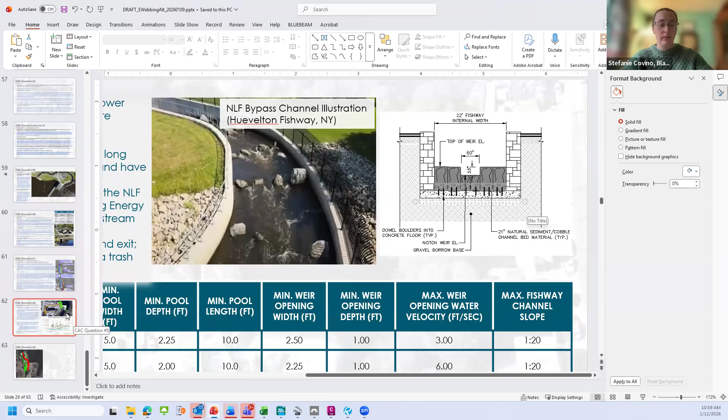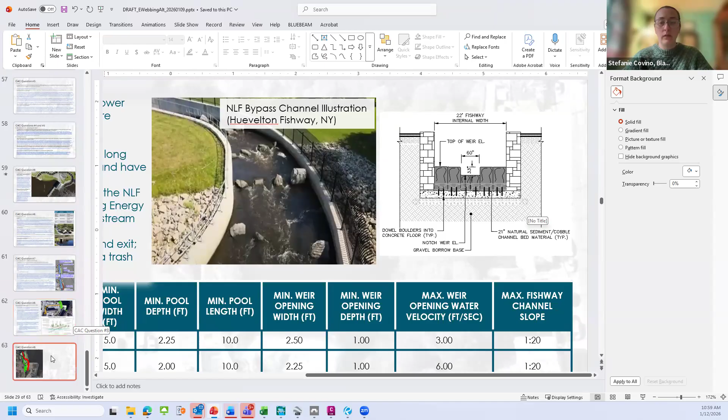Stefanie, one question you guys had too was just in relation to that portage. Yes, it was: can the downstream recreation access easement be used for portage below the dam and include stone steps?

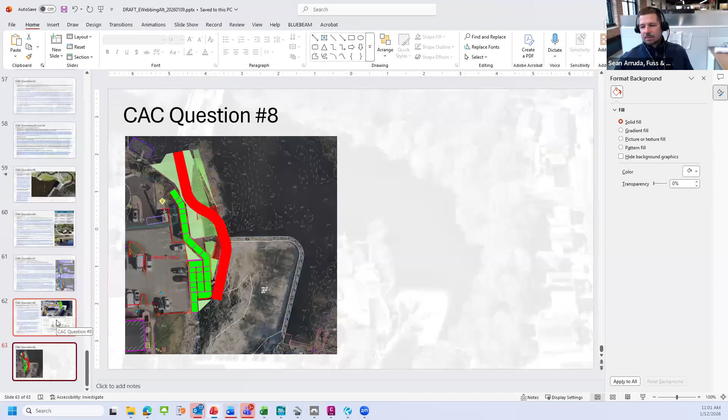And this does meet ADA requirements, because my experience with this is that if we put in a portage that doesn't accommodate all users, you could potentially run into some trouble there. So this portage here in green kind of shows laying it out, almost putting the downstream portage, almost fitting that in the downstream raceway channel, and almost taking the configuration we had in our alternative three, which was keeping the fishway in the river, and morphing that into somewhere between keeping it in the river a little bit but still running it on the upstream side of the raceway channel. So it's something to consider moving forward - I just kind of wanted to throw that out there. This wasn't a super - I didn't spend a whole bunch of time on that, but in trying to answer your question, my feel is that we should want to try and make this ADA accessible based on what I've seen from National Park Service and their recommendations.

We ran into a problem up in some Massachusetts project, where we did a portage - even though they don't have a portage now, we added one on the upstream side. Or we had one on the downstream side, but not on the upstream side, because there really wasn't much space to do that.

Essentially, what we had to do is apply for a waiver from Mass DOT on that one for why we're not providing it. So my answer right now is if we can accommodate all users, making it ADA, that's what we want to do, and I think it's possible to fit in there. It's just if we were to do a 22-foot wide nature-like fishway, there's not a lot of space to do that. But maybe there's an opportunity if we go with a vertical slot too, which is only 11 feet wide. Maybe we can fit both in there. So I want to just throw that out there.

Thanks. Yeah, I think that's a good point that in all cases we would prefer ADA accessibility. I think that question was more so of, can this be a temporary fix? Because right now it's really challenging. Is there a short-term, easier thing we can do to make this safer over the next 5 years or the next 2 years for our recreational kayakers to be able to portage this dam, that maybe doesn't meet ADA accessibility, but provides benefits for now until we can figure out how to do that.